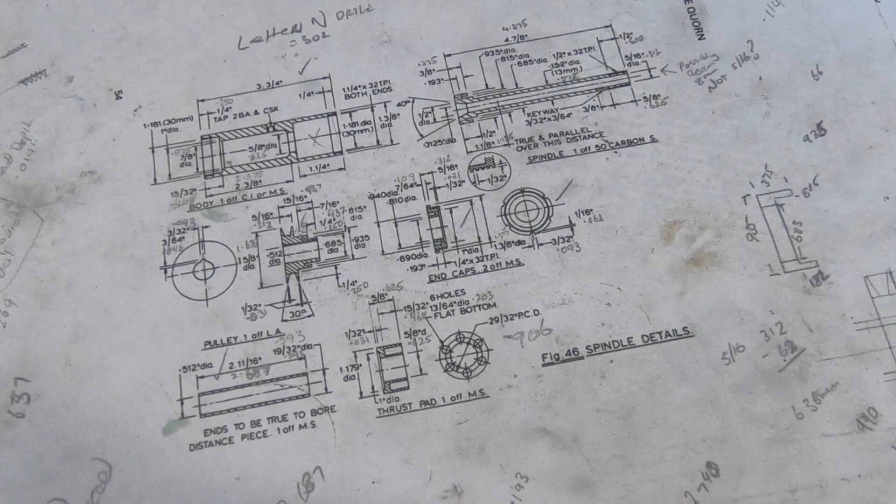Okay, I've got this part here machined up, the thrust pad. Now this contains 6 springs that put preload onto the bearing. I'm having trouble getting any smaller spring than this here.

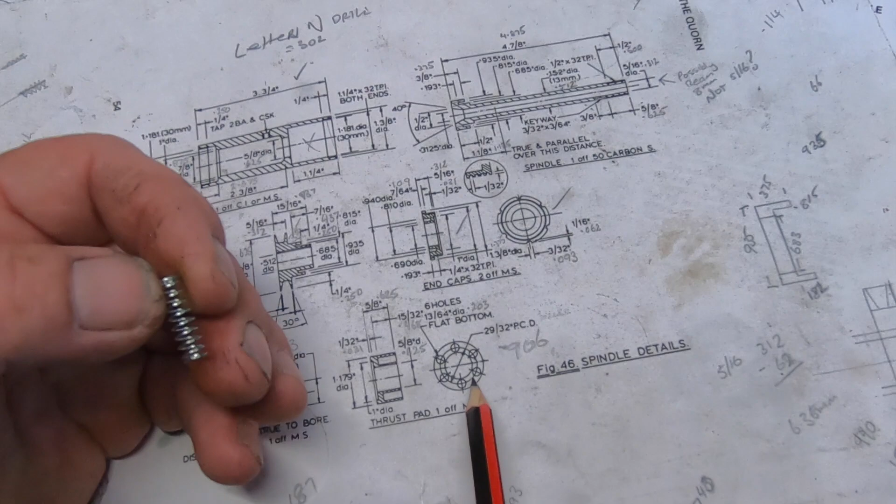So I forget what measurements they actually are, but that's the smallest I can get, apart from buying some music wire and having a crack at making some myself. I just don't know. I'm gonna have a crack at these, and if I bugger the part doing it, it's not that big a part to remake. If I bugger up these holes, I do have a little bit of leeway that I can make just a touch wider.

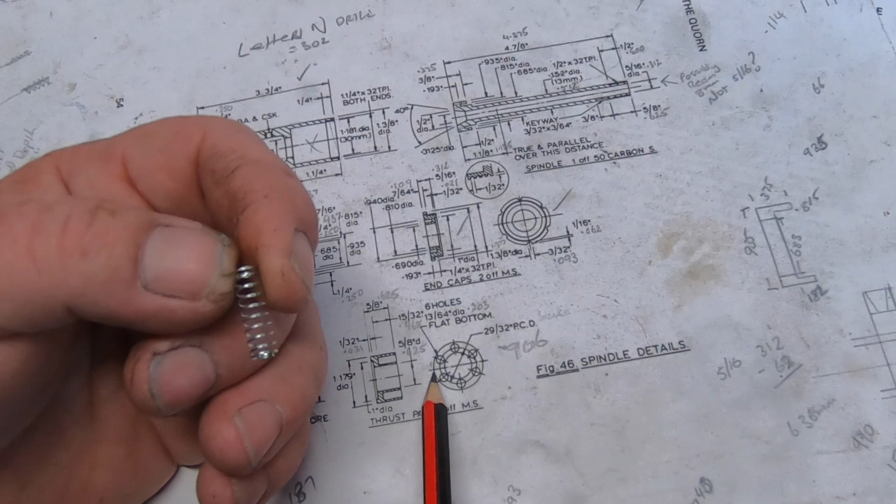If the sidewall of these holes are just far too narrow. So I'm gonna have a crack with these. Whether it works or not, who knows? But it'd be nice if I don't have to worry about trying to make springs. I've just seen a video from Chris making springs, and I reckon it's going to be a pain in the ass. That's Chris from, yeah, Just One Guy Metalworks, the emoji man.

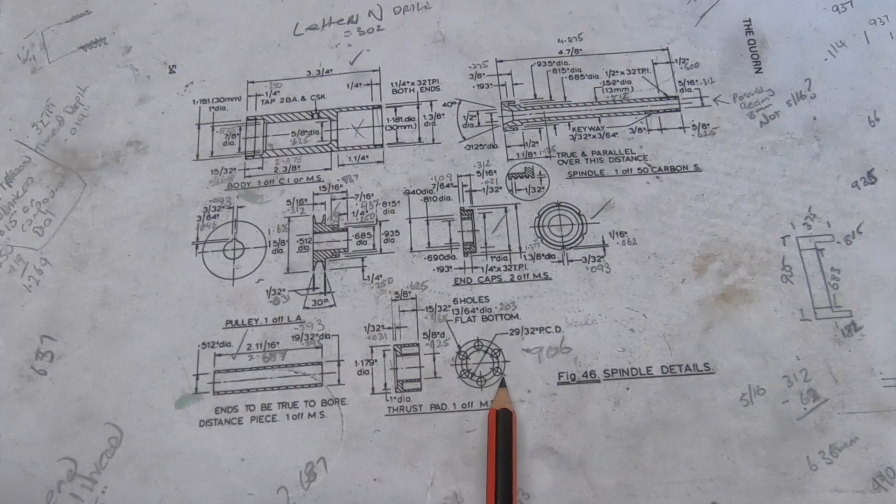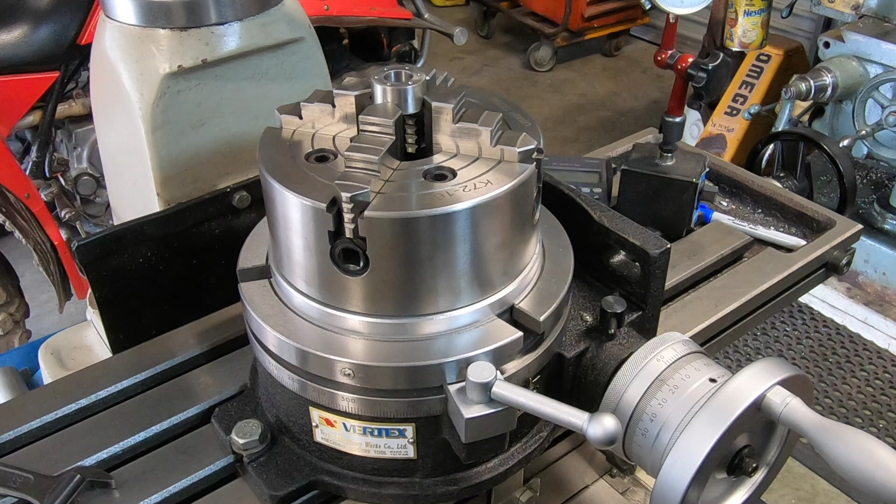So I'm going to have a crack at it. I've got a couple end mills here. So I'm going to use that one, and if I have to, I'll just flatten the bottom with a normal cutter. Anyway, we're going to have a crack at it, because I got a new toy on the mill. I'll show you that. So we've had a purchase. I finally got myself a rotary table. I've got the Vertex 8-inch table.

Went the 8-inch, I spoke to a few guys about it, and you know, for the machines I've got a fair bit of head height on this mill drill, and my theory is as well, you can make little things on big stuff, but it's pretty hard to make big stuff on little things, if you get what I mean.

Vertex is Taiwanese made, so I think it's a little bit better quality. There are exactly identical tables out there without the Vertex tag. Whether they're the same or not, I don't know. They probably do the same job, but you know, bugger it, I just went with it. I just bought the table separately. I will end up getting the indexing rings for it. They're about $160 odd, and I can't afford them at the present moment.

This chuck here is the one I had on the small lathe, which was probably a bit big for it, but it did handle it. So I pinched it off the kids and just made an adapter plate up out of aluminium, which is mounted to the table via the T-slots, and this is just 3 bolts that go through the front into the aluminium plate. That was pretty easy to make. I did cut it out with the rotary table and I had it on the Cincinnati.

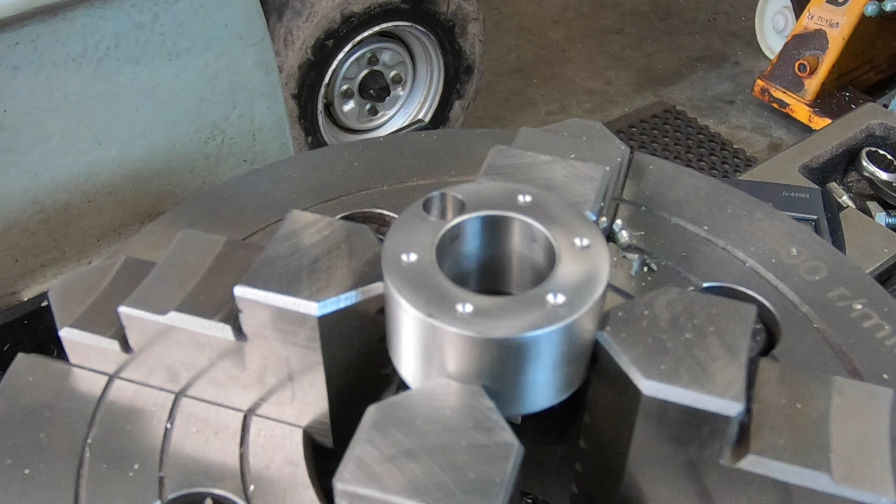So this part may even be scrapped yet, but we're going to give it a go. We've got nothing to lose. So I'll change out to the collet chuck and we'll have a crack at it, eh? Okay, I've just done one hole off camera, just to see if this is going to work or not. So I went down, it's a 2 flute ball end mill.

And then I followed it up with this 6mm end mill, just to put a flat bottom, and it did take it out. It was a touch tight with this ball end mill, but I went down 7.5mm deep. Just still compresses full depth.

Shit. Where'd that bastard go? I'll be back when I find that bastard. 15 minutes later, the bastard's back.

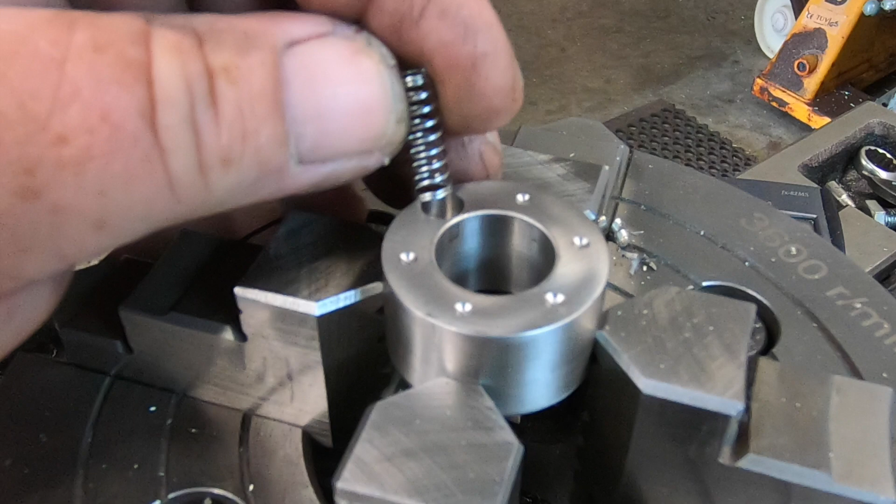So as I was saying, this will compress all the way. No dramas at all. So I'm gonna just wing it and do the 6 holes at 7.5mm deep. If I have to, I'll have to indicate it all back in after I trial it into the spindle. Indicate it back in and then maybe go deeper.

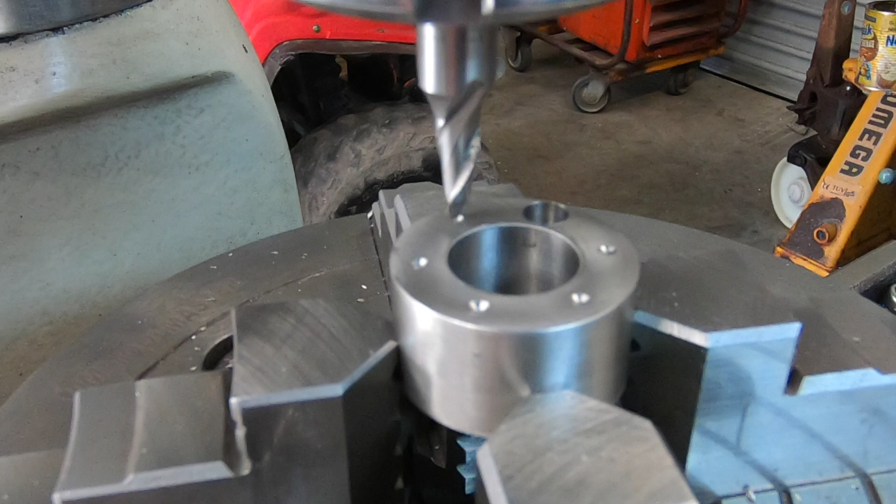So, oh, the bastard, find that spring. I'll give you the tip. Never mind. So what we got to do is go 60 degrees. 30, 40, 50. Table's locked. And the camera's going to get hit. We are spot on, George. I don't know if this camera's going to vibrate around or not, but just have to wait and see.

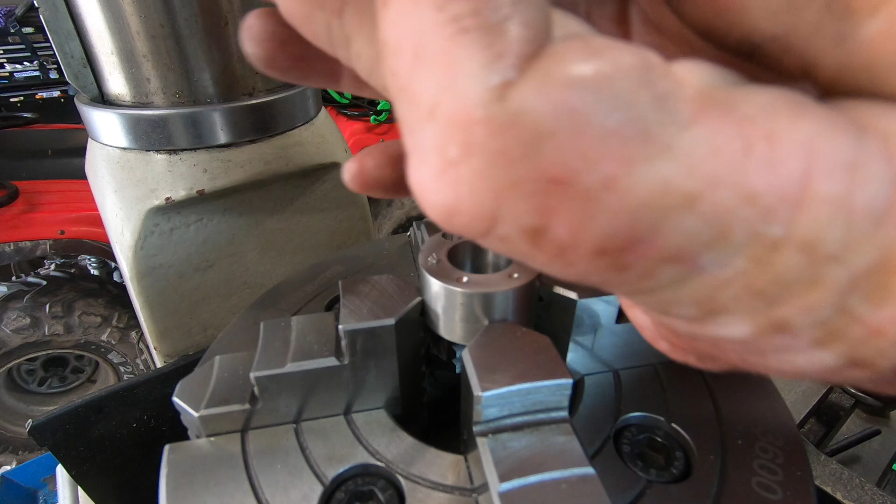Oh, you dickhead, put in the wrong collar. Not enough cups of tea this morning. And the wind's blowing like a bastard. I don't know if you guys notice, but every time there's heaps of wind, everyone's cranky. Me included.

Me being a dick, I forgot to chamfer that. I better do that before I go and move again. I'll have to come back and do that one. But that's the advantage of it. I can go around and index it properly. The joys of having a rotary table. How cool is that? Sometimes the most simple things in life are the most rewarding.

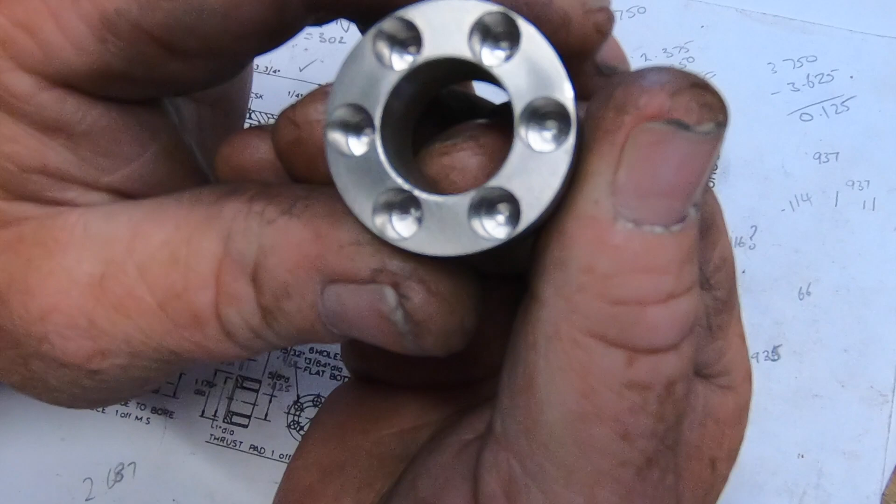Decided to go to the 60-degree centre just because there's bugger all sidewall there. Just so the chamfer didn't cut into this to the side and look shitty. That's what we ended up with. 6 perfect holes. Well, as good as perfect anyway. Most accurate thing I've ever done for a long time. Yeah, pretty happy. Oop, and the springs fit. Got to be happy with that.

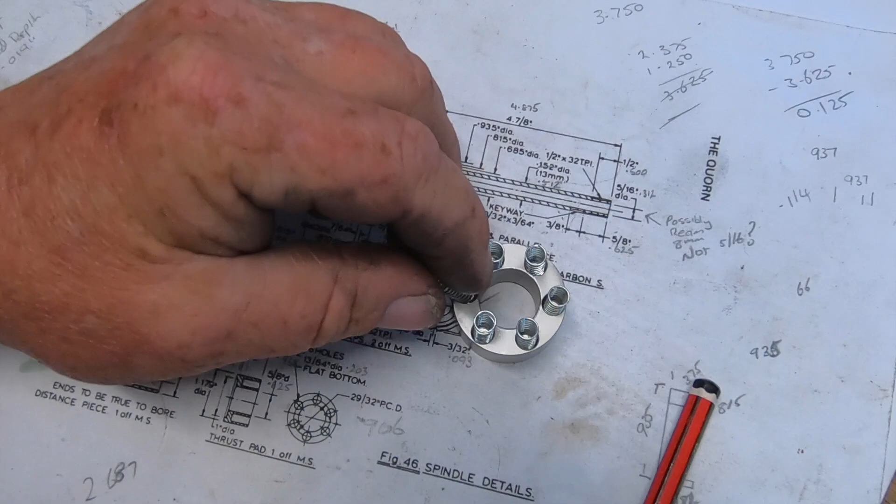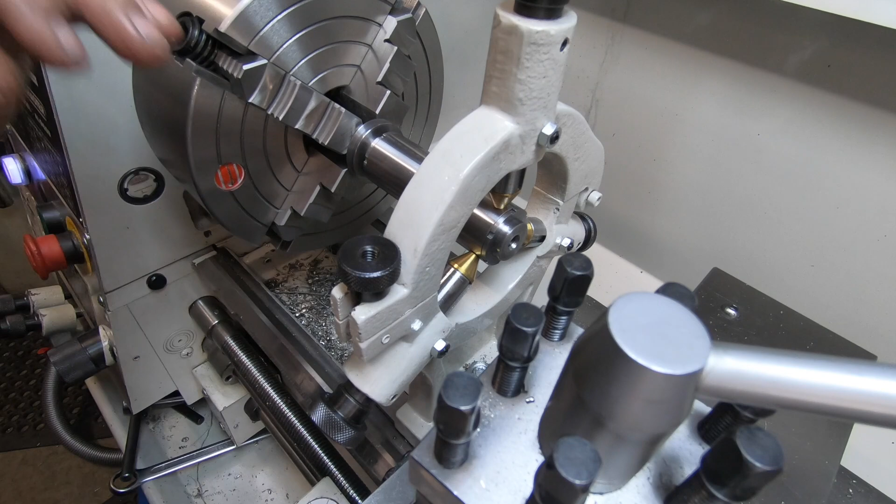So this can now be jammed in the spindle with the bearings. Exciting time. Spindle is together, and I do not plan on taking it apart again. That's it, it's together now. Well, I've had it running for probably 20 minutes, 25 minutes, just on about 300 RPM, just running them bearings in, and nothing got hot. I ran it at about 900 for 10 minutes or so. Nothing got hot. So to me, it's okay. It's going to have to be.

So I've clocked the end of the spindle true in the 4-jaw. Then I've run the indicator up and down on 2 planes here, on the side plane and the top plane, and got the spindle running true. And believe it or not, this end of the spindle, I've got the housing running true, and this end of the spindle is running very true. So I've done something right, thank God.

I've got to bore the inside of this 1 1/8 in, or 1 1/4 in, whatever it is, true to the axis now. So it says in the book. Then the rest of the inside of the spindle is just clearance for the draw bolt, and then turn the taper, and then I can say that the spindle is finished.

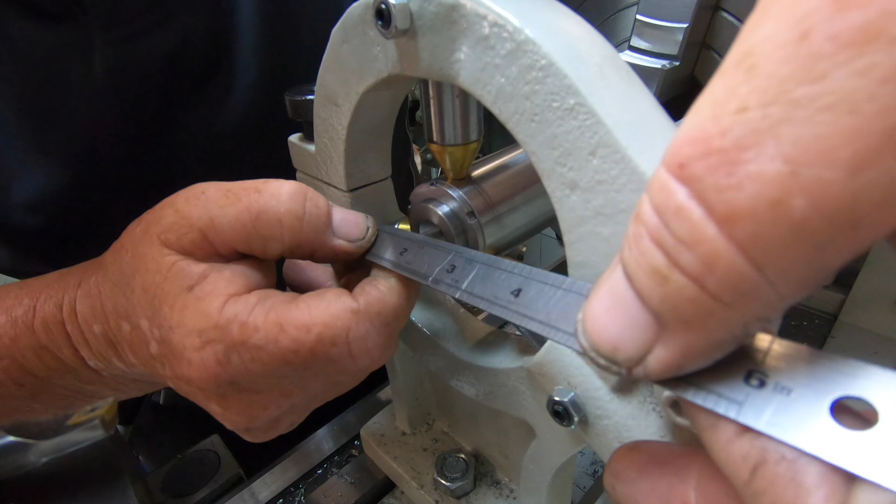And the good thing was I put quite a bit of oil in this chamber. You can see the oil is slowly coming out, which is preventing any dust from going in there. It's a bloody good thing. I did put a fair bit of oil in there, hoping that was going to be the case when I assembled it as well, around these end caps. So that did work, thankfully. I think we're right to take it out. Hopefully.

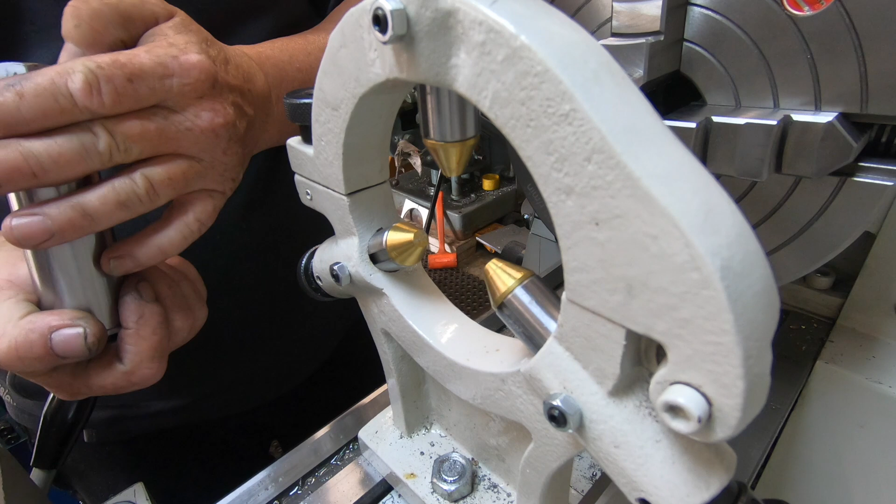Oh, damn it, a bastard. I did damage the nut a little bit with the four-jaw, but I'm not overly concerned about that whatsoever. It still feels good. And I think we've had a win, eh? What a mission that was.